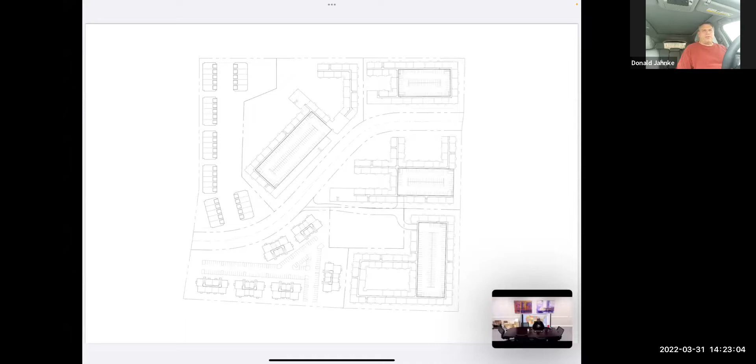What we haven't seen long term is if people live in a unit and it's healthy, comfortable, and affordable, it's going to change the turnover rate more, because you can't go get another unit like it. So that's where we think we're going to gain even beyond this.

So can you see my screen finally after all of this? Yeah, thanks, okay, yeah, wow.

That's beautiful - so what Alvin did, this is the site in Anna. What Alvin was describing was we have residential. On the left side here is where we have these townhomes - you see they're built in units of 5, and they're even showing the garage doors on here. That buffers the existing single family houses to our new development. And then around here, let me grab my pen.

This is the 30-acre site in Anna for 700 units. The lady just brought us a survey, and the city told us that they wanted that connecting road going through there. In a couple of hours, we had this whole thing designed.

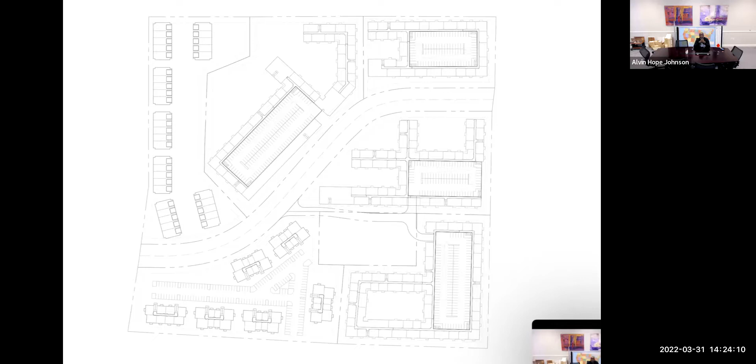So this road here goes all the way from the existing residential, and then eventually it continues on out our development to a major intersection at Highway 5.

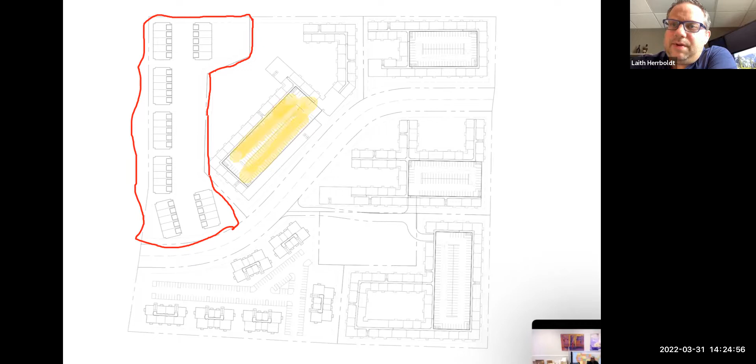Then we have, let me delineate this a little bit. So this is our townhome development here, and this is our buffer area. Then we have a few different multifamily pods. Everything in yellow here, these are all of our parking garages.

In the middle, and then what we did is we wrapped these buildings with apartments around the parking garages, and then they have some wings coming off in different areas as well. So it allows for high density multifamily, but it's still a nice product, and people enjoy it.

We can offer more amenities this way. For instance, at the top of the parking garages, we can actually use that and decorate it with landscaping, and the city will allow that if it's accessible to the tenants. A lot of cities will count that toward the green space you need on your site. So instead of reducing the building size because you need to maintain grassy areas and trees, you can keep your building size where you need it to be to make the project work, and then use the rooftops for your green space.

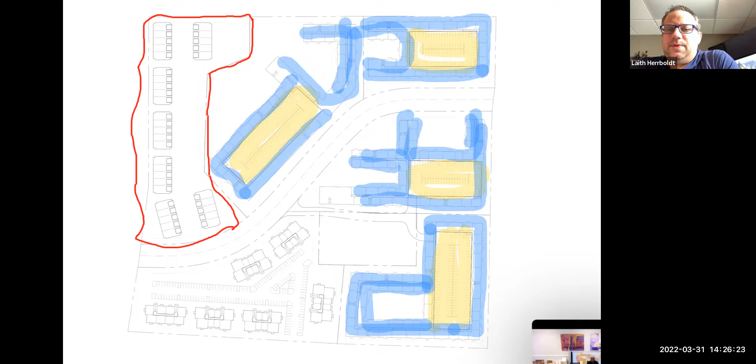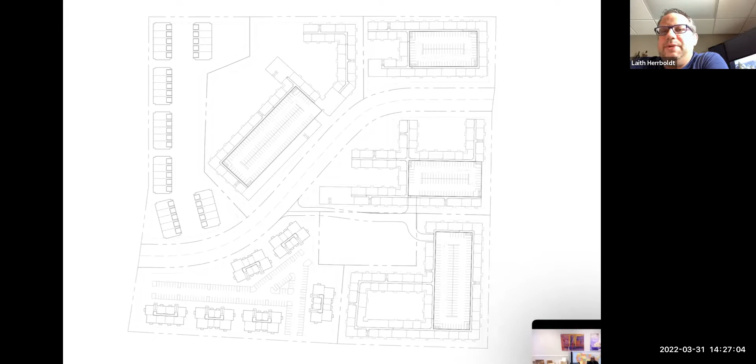What we can even do, not on this one, but on some of them, we're looking at putting in swimming pools. In regards to energy efficiency, we've seen on those parking garages where they have swimming pools and green space, trees, grass, and cooking areas. We've also seen solar panels that are translucent, so some sun shines through into the pool, but when you're in the pool you're not blinded by the sun and baking in it. So there are different things you can do, increasing your energy efficiency, putting that energy back into the building and reducing your cost. That's one of the things we do or can do.

Let me get to another photo here. This is another perspective of our Anna site, more of a 3D model of what we were just looking at. So now you see the townhomes down in the yellow.

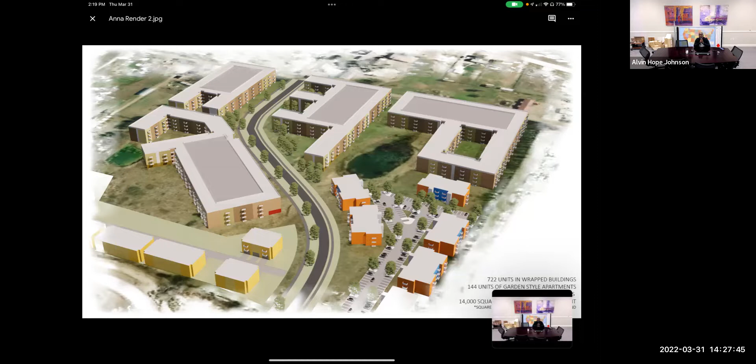Laith, do you happen to have the building on the other Anna site? Let me see if I have that.

So this is some more of that high density, but then Alvin can speak for a few more minutes.

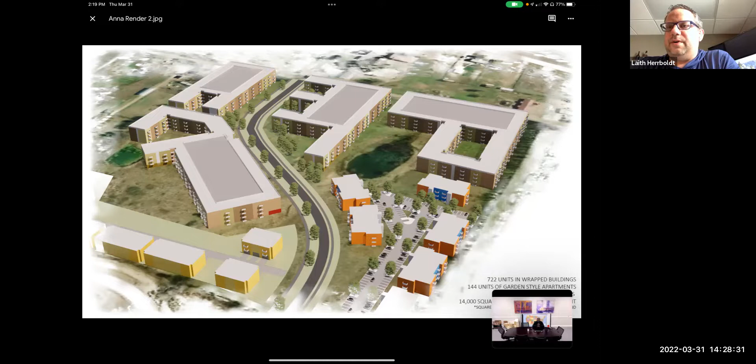I'll keep looking for those A's and B's, that kind of typical garden style. We did have it on this one as well. Let me bring this picture back up real quick. You can see more down in this orange and blue area, more of those garden style multifamily apartments. Your typical apartment building with 24 to 32 units, or up to 60, or however many the density makes sense for. So we try and incorporate whatever we can into the development to make it more wide ranging and feasible for everyone.

Okay, I'm looking at the Northgate plan right now. But Don, this was before we made the modifications to the restrooms, isn't it?

Yeah, at 95% set, that's not quite there yet. Do you have the A or B, the Anna stuff, Alvin? Let me look. Yeah, that's what I'm just looking for right now too.

I think I've got some here. No, I don't have... yep, any. Okay, I've got some here. Give me a minute, I'll turn this into photos and get this up on the screen here.

So while Laith is doing that, typically the way this could work, we could work with you guys to put it together. We would build a pro forma to come up with a value of what we think your buildings would be worth, based off the pro forma, the area, and comps. Then we could back our way into a number all the way down to the development cost.

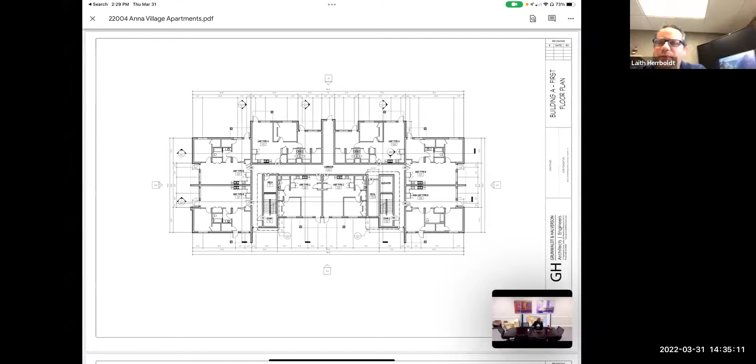Zoom in a little bit. So this is more of a typical multifamily building—these are 8 units per floor, 4-story buildings, so there's 32 units per building. I'll just mark this up so you can kind of see.

We've got a B unit here, another unit here, and then an A unit over here, B's again on the right side, and then we have our C unit here. So the difference is we have 1 bedrooms, 2 bedrooms in the B's, 2 bedrooms in the A's, just a different floor plan, and then we even have a D unit, which I can show you in a minute, which is a 3-bedroom unit.

But the nice thing about a building like this, what we decided to do on this plan was have front doors coming off the parking lot, but then we also have a rear door that goes out to more of a grassy area. We have a waterway in the back that we need to maintain because it's part of the Waterways Act. So what we did is took advantage of that and provided a rear door out to the nice, grassed area where tenants can go and have a little bit of a backyard.

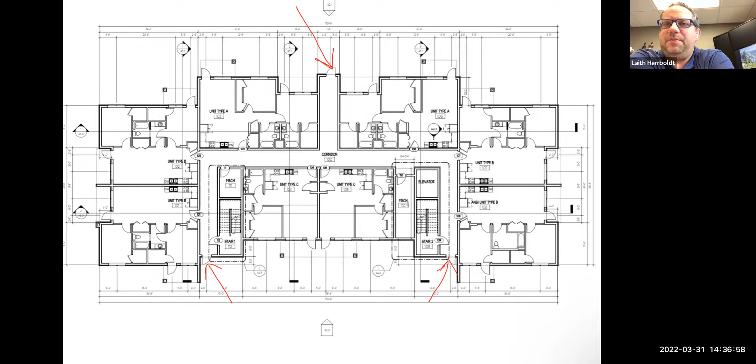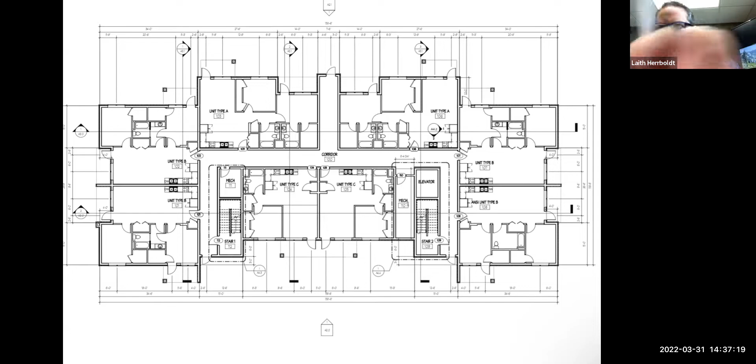So in this building, we do have an elevator in this area here, since it is 4 stories, and then we have 2 stairwells. I can show you some unit plans now.

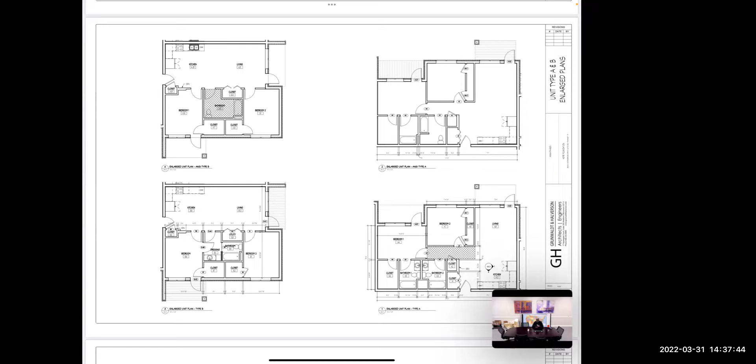One of the differences here, typically you would see a water heater in each individual unit, but we put commercial style water heaters and pipe it around. So we're making more use of the space—it's more renter tenant usable space in the apartments instead of giving that up for mechanicals in each unit. We're also thinking about long-term ownership, so when you start having to replace 200 hot water heaters in 7 or 8 years, that's a big difference.

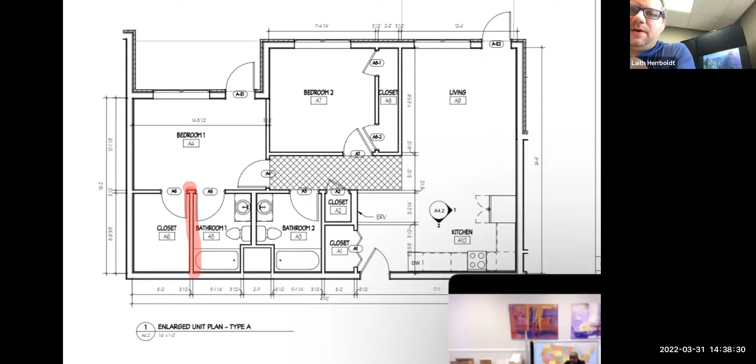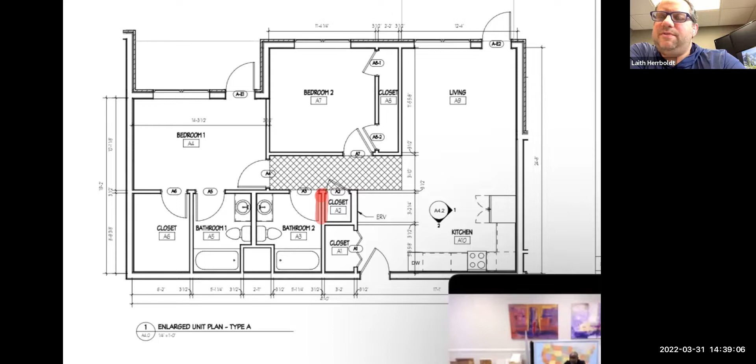These plans don't reflect the pod changes that we've instituted, those bathroom pods, but the nice thing about the pods is this whole unit here, these 2 bathrooms would show up, and we incorporated this area as well. So what we have is this closet right here—we rotated that door and put it behind, we put it in this wall. So now, from your main bathroom that's accessible to everybody in the unit, you have this door where the red line is, and that's your washer and dryer built into your bathroom pod. When those pods show up, they'll be completely finished: tubs, toilets, vanities, tile, ceilings, washer and dryer will be installed. Everything is ready to just hook up to the plumbing and continue the build process.

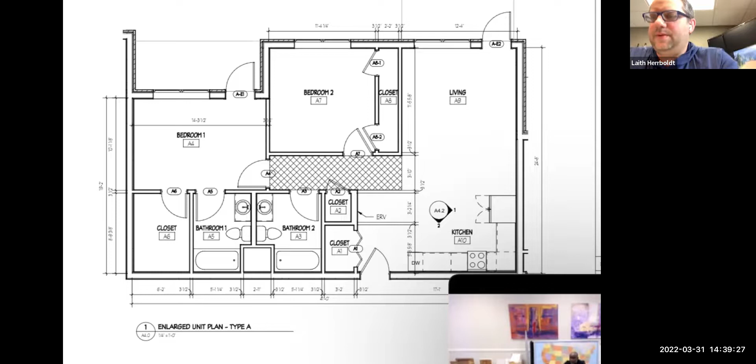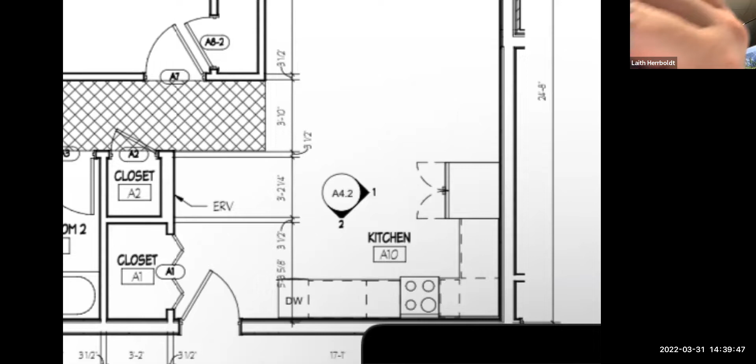Dishwasher. Oh, we can't hear you. Plumbing—oh really? Yep, we can hear you now. There you are. Sorry, we had a plane flying overhead, and I'm guessing my microphone noise canceled me out.

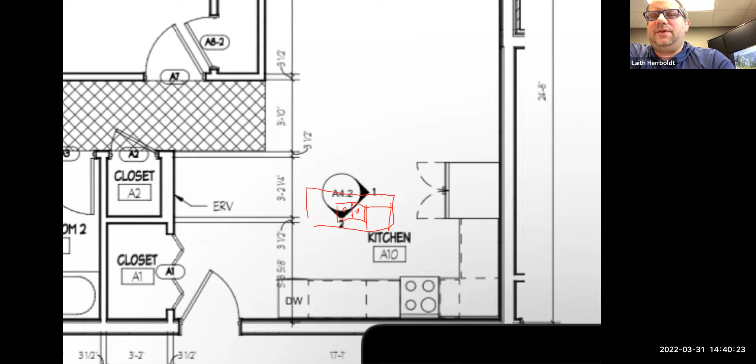So we have the kitchen island now that we've incorporated as well, which has a sink and dishwasher. And when that kitchen island comes in, all the plumbing is in the floor, not in the walls. So it adds a little seating area in addition to the kitchen, and then it frees up more counter space in your kitchen area, because now you don't have a sink eating up square footage or counter space—it kind of simplifies your kitchen design as well.

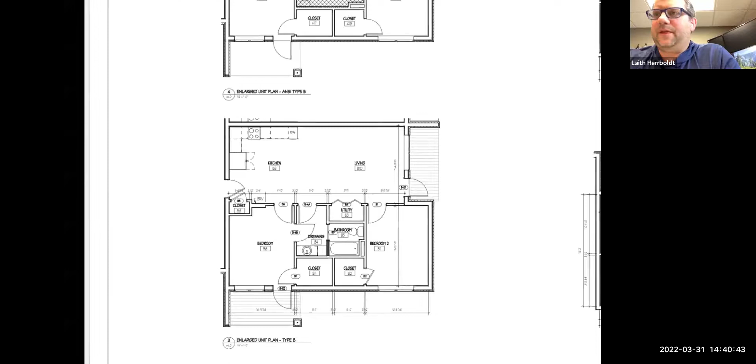So that's some of the standard unit plans. And then we've gone to induction cooktop stoves now too, so when you're cooking, if a little child reaches up and touches the top of the stove, it's not hot. We're trying to put the safety side into it.

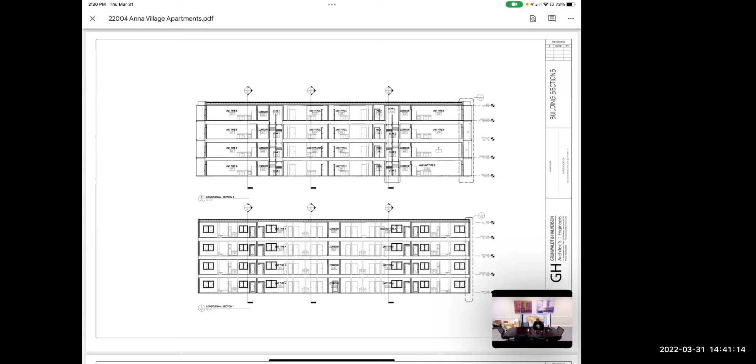And then there's also sensors in the floor in the bathroom, underneath the kitchen sink, underneath the vanity sink. So if any water touches those, it instantly calls the building manager so he can go there and find out what happened—what's the problem, a leak and stuff.

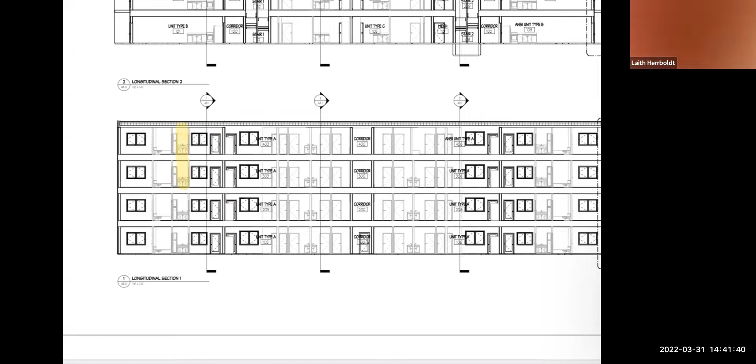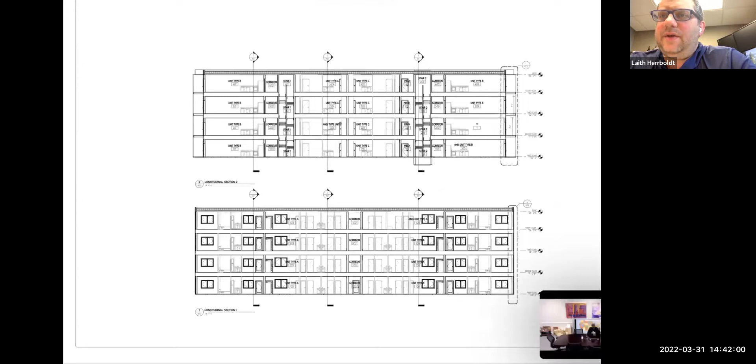Something you'll see in a drawing like this, which we call a building section, is that we actually stack everything up. We have our party walls coming all the way down, our plumbing and bathroom vanities coming straight down, so all that plumbing stacks on top of itself. All the toilets are in line, and all the vanities on either side of this wall are in line.

And so, yeah, this is wood construction.

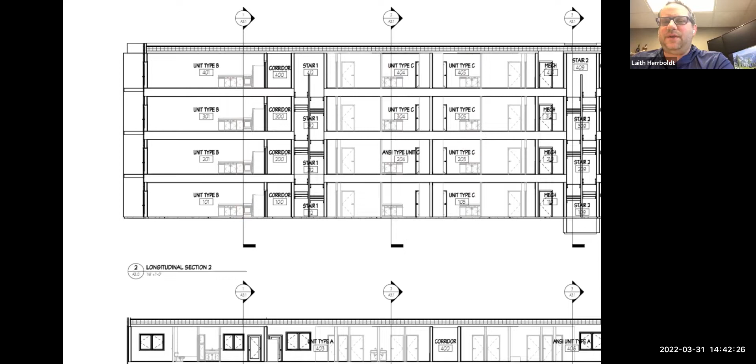You'll see even all of our kitchen stacks, all those kitchen islands, and going back to vanities, they all stack. We really focus on those efficiencies, because if guys working on this project repeat everything over and over again, that just makes it simpler, keeps your costs down, and makes it a faster build process. So we take all those things into account when we design things, to make sure not only does everything look nice, but it's picking up efficiencies in the building process, the design process, the labor process, and even maintenance down the road.

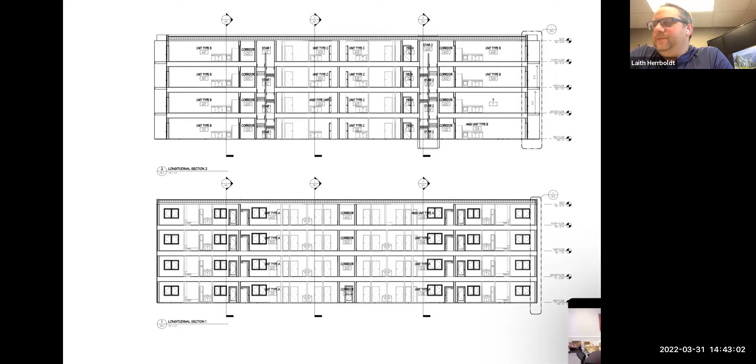Mhm. Wow. I got one more point I'm gonna show you really quickly. Okay, find it. Yeah, okay.

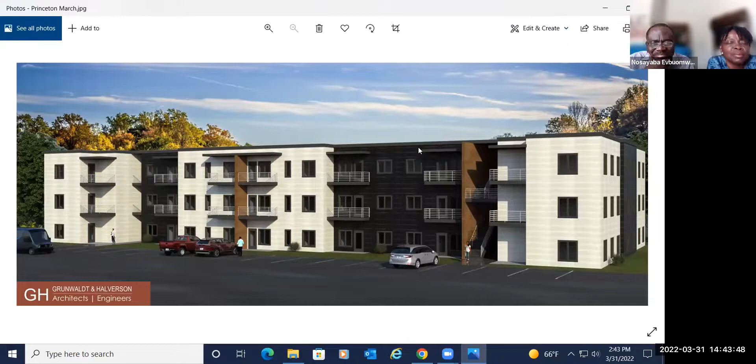This is our building for Princeton. Nichiha house siding, aluminum decks on the exterior for patios. They're all the same size, I think we have two sizes, so it makes it really easy for fabrication. It's 3-tone Nichiha, those are 36 by 18-inch blocks, so it's gonna look really, really good, not like a typical apartment building. And we are so proud of this.

It's taken us a long time. This site in Princeton, we put it under contract April of last year. From April of last year until probably now, we have changed plans to maximize this building, to maximize the SIPs and all the mechanicals, so that we could get to a place where Laith could show you what we just showed you.

Wow. Wow. Good. Good, it's worth it, very good. So we love the opportunity to work with you guys.

We could take your plans, Nosa, that you've done, and let Laith look at them and make some suggestions, or if you like what you see, that 3-story building we've got, with the bathrooms and everything so efficient, we can take it, plug it into your site plan, and make it real easy and simple, and save a lot of redesign costs on what you've already done.